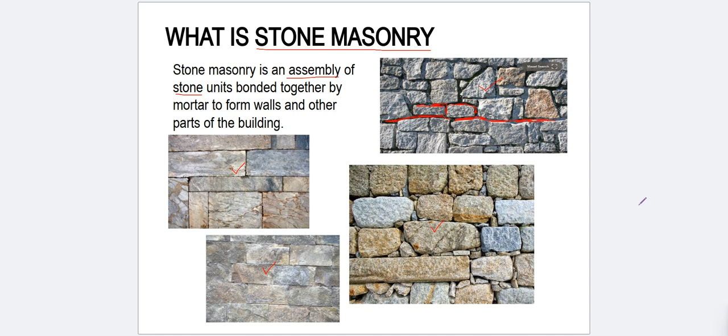So we have different kinds of classification of stone masonry. Number 1, the rubble. If we say rubble, it is essentially crude, uncut stone collected as fieldstone having rounded natural face or angular broken face. These are the angular broken faces - this is what we call rubble, with angular cut faces or rounded ones.

There is no attempt to produce an orderly course, whether vertically or horizontally. Small spaces are filled with smaller stones when laid on a wall. The pattern can be like this - this one is coursed, meaning in a horizontal or vertical manner. So that's how it looks when you lay it in course.

When it's random, if you notice, it has slanting, horizontal, and vertical pieces, and other spaces have been filled by small cuts of stones. So that is random layout. And this here is the coursed layout.

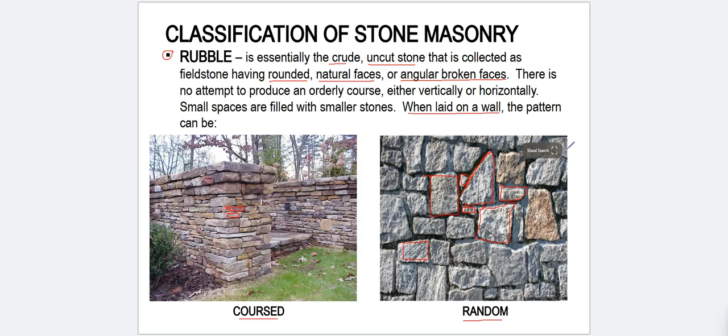So that's the rubble classification. Next, we have ashlar masonry. Ashlar masonry requires the use of finely dressed cut stone - processed stone, cut through machine, and sometimes further treated, like sanded now. It's carefully worked and joined, laid together in cement or lime. It uses cement as a finer bonding agent.

Cement or lime mortar of equal size joints that are at right angles to each other - so uniform. Let's see, is it at right angle? Yes, right angle, same on the other side, right angle. Any design used in a formal layout is ashlar masonry, and we have different kinds - later we have coursed and random ashlar.

So the joints between the stones are very thin. We can obviously see that. So it has regular or uniform thickness, which makes ashlar masonry very strong and sturdy.

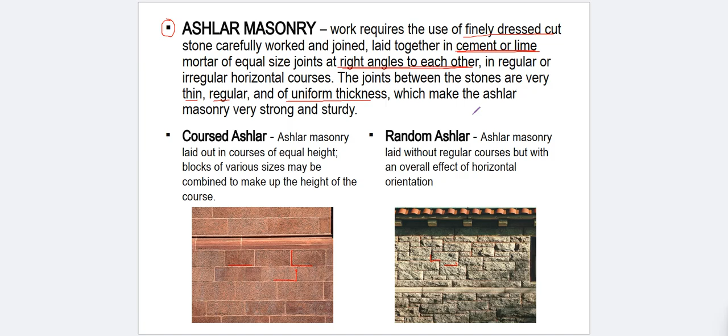Okay, we go deeper into the image of the coursed ashlar and random ashlar. What can you notice about the two, between the two? Anyone? You can raise your hand and give your opinion between the two. Alright, can you speak? The first one who raised their hand.

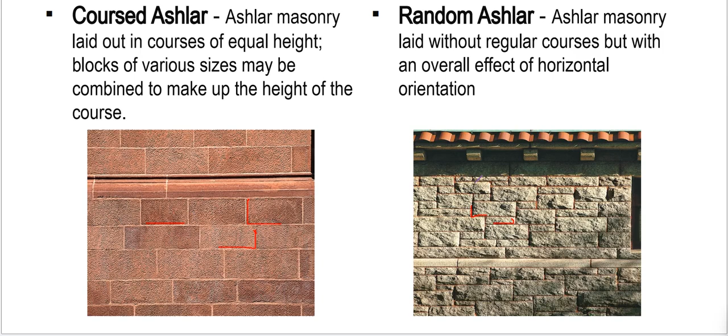So obviously we can see what the difference is between the two, and one prominent difference is the orientation and layout. In random ashlar, the sizes are also random, although the thickness between them is thin, but it still has the characteristic of ashlar masonry. While coursed ashlar, as we saw, is uniform in size. Okay, thank you so much.

We go to the next type of masonry.

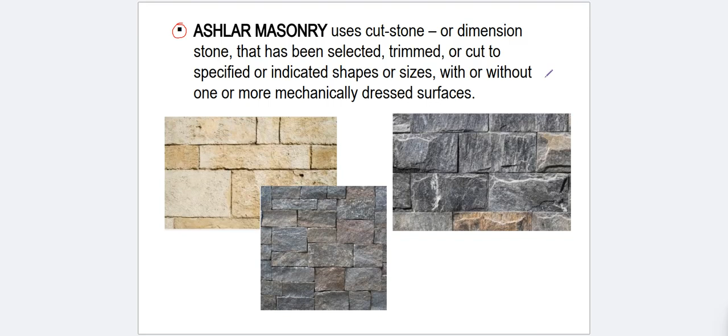Additional definition for ashlar: it could be selected, trimmed, or cut into specified or indicated shape or size with one or more mechanically dressed surface.

Type of ashlar masonry - ashlar masonry has subcategories. There are factors like the arrangement of the stones, laying of the stones in regular course, regular courses with continuous joints, broken courses, height and length define these types.

Number 1 is ashlar rough tooled masonry. In this type, the beds and sides are finely chiseled and dressed, but the exposed face is dressed by rough tooling. You can use a rough tool, like a steel brush, for example. This dressing gives the masonry a rough, exposed finish.

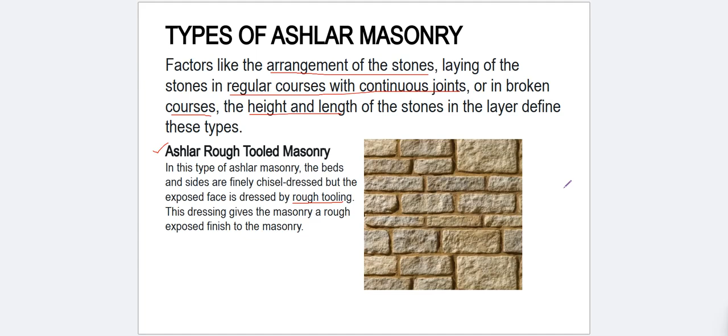If we look at it, even at first glance you can tell it's already rough. Its application can still be used for interior, but mostly it's used for exterior. So that is ashlar rough tooled masonry - tools are used to make it look rough in appearance.

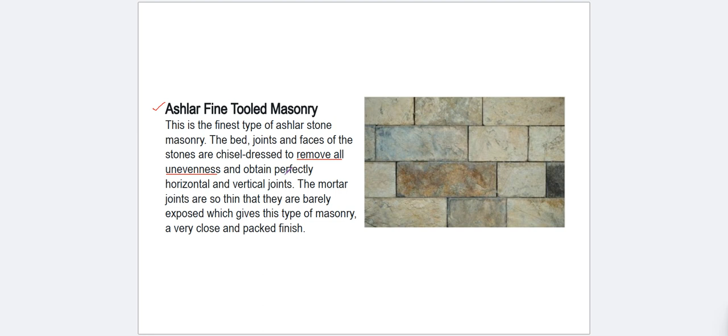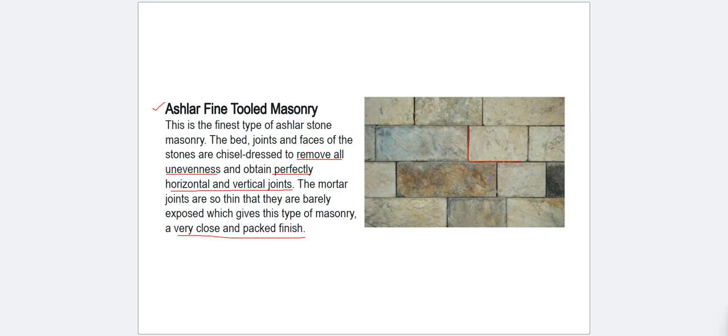Then we have ashlar fine tooled masonry. This type of ashlar stone masonry uses fine chisel dressing to remove all the unevenness and obtain perfectly horizontal and vertical joints. You can see the vertical and horizontal edges are fine. The mortar of these joints is so thin that they are barely exposed, giving this type of masonry a very close and packed finish. This is its appearance when we zoom in - ashlar fine tooled masonry.

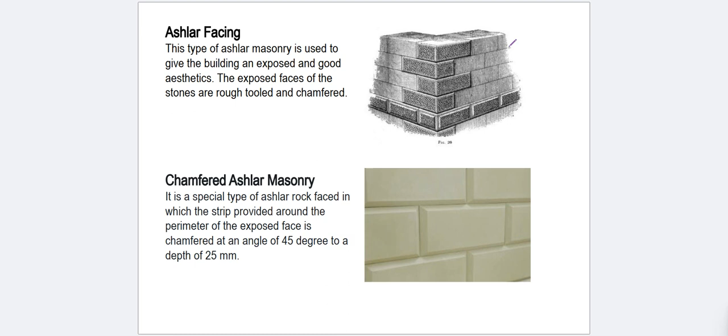Continuing, we have ashlar facing. The facing of ashlar varies depending on the type and location of the masonry on the face of the wall. This is called the ashlar facing technique, a type of ashlar masonry used to give the building an exposed and good aesthetic, especially used at corners.

The exposed faces of the stones are rough tooled and chamfered. Chamfered means it is given a smooth corner cut, usually when it's chamfered.

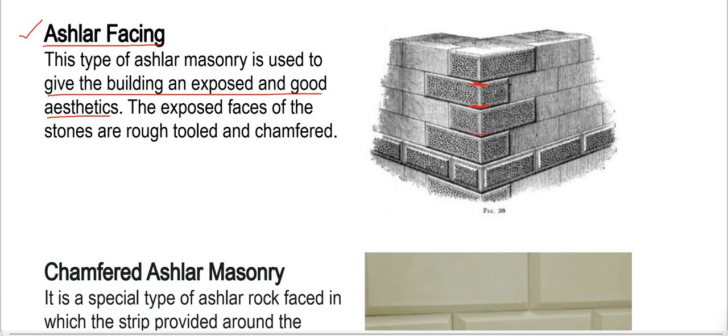Next, we have this type of ashlar masonry, the chamfered ashlar. This is a special type of ashlar rock face in which a strip is provided around the perimeter of the exposed face, chamfered at an angle of 45 degrees to a depth of 25mm.

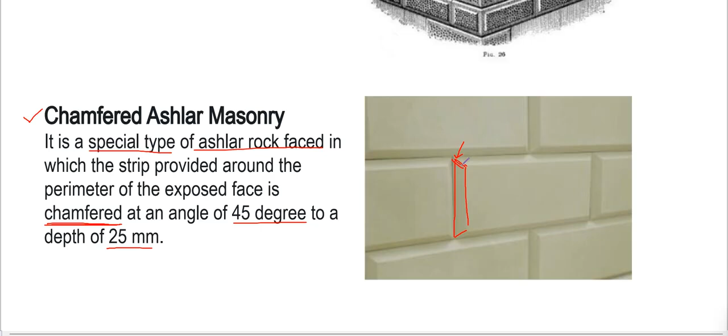Chamfered is the term used here, but in glass, the term used is beveled - we bevel it. So this side is more like cut away from this side area. Alright, so that is chamfered ashlar masonry.

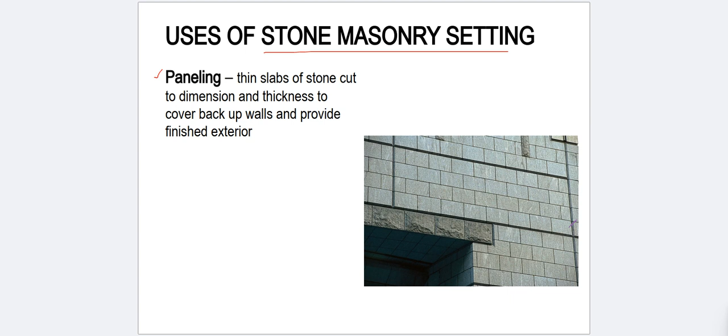Then we have the stone masonry setting - uses of stone masonry setting. Number 1 is paneling. These are thin slabs of cut stones, cut to dimension and thickness, to cover back-up walls and provide a finished exterior. It's used as a finishing material - if you have a back wall that you don't want exposed, you can apply paneling to it.

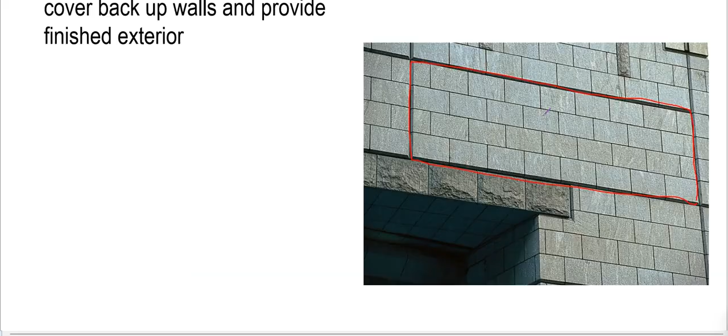A whole cut of stone masonry is placed on your wall. We have different kinds of adhesives used for that certain type of ashlar paneling - stone masonry paneling. That is one of its usages.

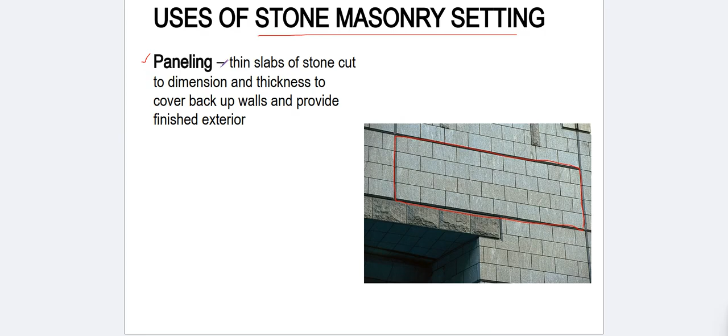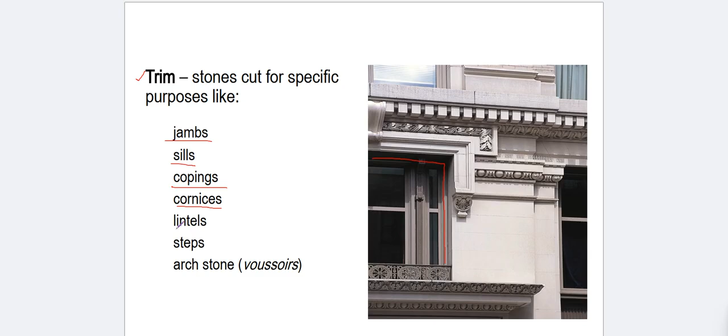We have trim - one is paneling, and we also have trim. These are cut stones for specific purposes like jambs, sills - the jamb of a window - also sills, coping, cornices, lintels, steps, and archstones, or what we call voussoirs.

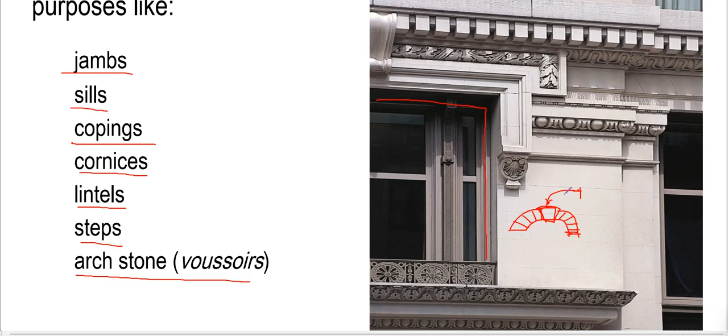That is the arch stone voussoir. Next, usage.

Checklist for stone masonry: how to check a good type of stone masonry. The quarry must have sufficient stone of the selected color to satisfy the needs of the project. Stone selected must be capable of withstanding the rigors of weather. Veneer thickness is a function of panel size, regarding handling, transportation, erection, and structural adequacy, with details of installation to inhibit moisture movement.

So we use damp proofing. This is what we place on the connection between the two, for your walls. This area could be your masonry paneling, or your trims. After that, there's damp proofing and backup material before, so that water cannot get in - to inhibit moisture movement.

Next, mortar, when used, should be of the non-staining type so it doesn't leave marks on our stone masonry. Obtain samples to verify color, finish, and texture variation. That's the most important part - why the client is using natural stone - because of the color, finishes, and texture.

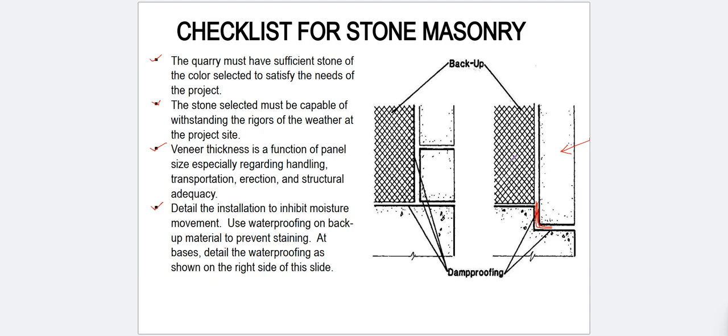So those are the checklist items that you need to do when you encounter masonry finishes.

Next in our discussion is brick masonry. We already know what brick is, but we will define it in our discussion. So brick masonry involves the assembly of bricks.

Earlier we discussed stone, right? Now we use brick instead. It includes mortar, which is placed in the middle between the two faces of your bricks, joint, bond or tying, and workmanship to ensure performance, appearance, strength, and weather tightness. So that is what we call brick masonry.

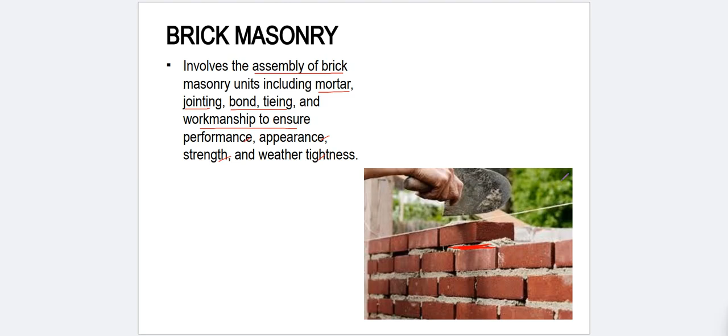So this can also be called layout. So what is a brick? Brick is made from clay or shale that is finely ground, mixed with water, molded into the desired shape, dried, and fired in a kiln.

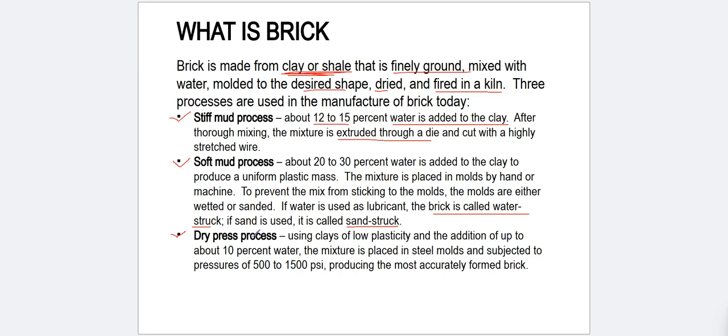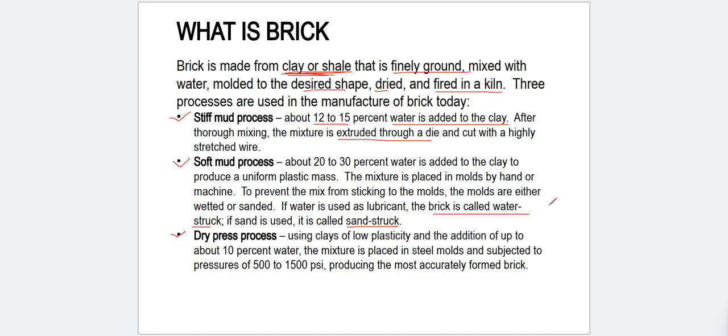Next type of process for bricks, we have the dry press process. Using clay of low plasticity with the addition of up to 10% water, the mixture is placed in steel molds and subjected to pressures of 500 to 1,500 psi, producing the most accurately formed brick. So that is the dry press process for brick making.

We have types of bricks. The building brick, commonly the red brick you can see used as material for walls, used for foundations, also as backup for exterior solid walls. It is used as facing brick depending upon its color after firing - there's light red to dark red. Whether the face has been textured by scoring, combing, wire cutting, or otherwise treated provides a unique surface appearance - it gives a different effect when used as finishes for our walls.

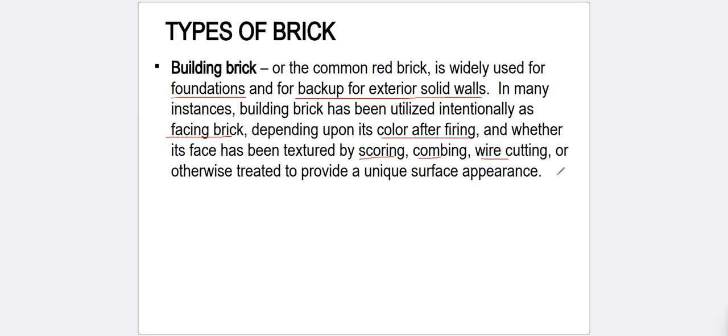We have facing brick, another type. It is made from clay, shale, or fire clay, or a mixture of them, under controlled conditions. The appearance is governed by three types. Number one is general use, exposed exterior and interior for masonry walls and partitions, where wider color range and greater variation in size are permitted.

Number two, general use for exterior and interior where a high degree of mechanical perfection, narrow range, and minimum permissible variation in size are required. Then lastly, bricks are manufactured and selected to produce characteristics of architectural effects resulting in non-uniformity of individual units - similar to the layout concept we discussed with stone masonry earlier.

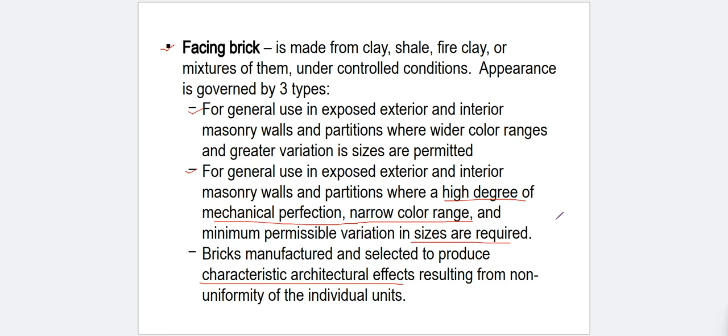We have another type, the glazed facing brick. It's still a combination of clay, shale, or fire clay mixture similar to facing brick, with a finish consisting of ceramic glaze fused into its body.

So the other requirements are concerned with properties of the finish with respect to imperviousness, resistance to fading, resistance for crazing, flame spread, toxic fumes, and hardness and abrasion resistance.

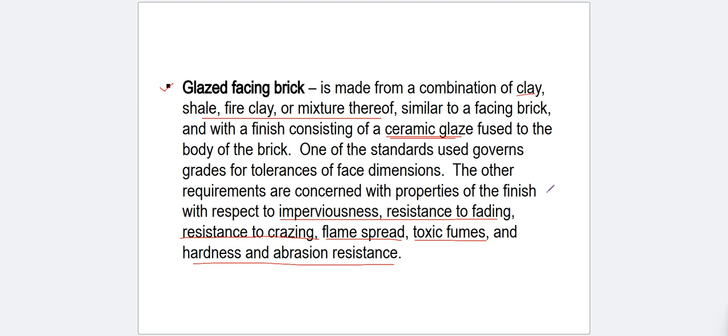Another important factor for bricklaying is the mortar. That's what we put on the face of our brick in order for the two bricks to combine or bond. So the primary function of mortar is to bond.

Together so that the mortar joints are durable and act as a seal also against entrance of water. Because if there's no seal, no mortar, water will enter inside your brick masonry.

Another important property of mortar is workability, meaning it can be adjusted, or there's an adjustment between the two pieces. Also water retention, strength, and its ability to heal minor cracks.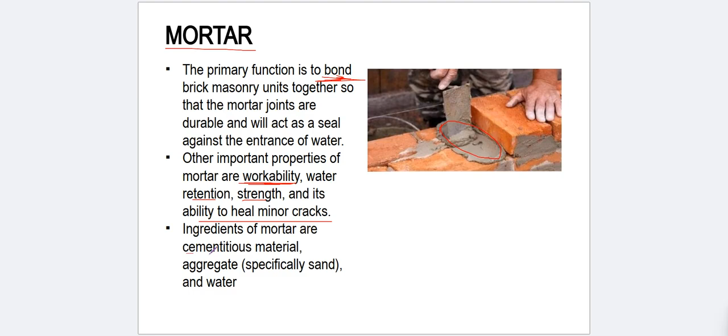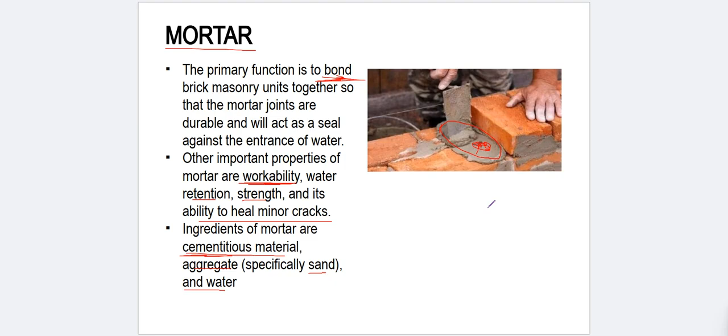Ingredients of mortar are cementitious material like cement, aggregate specifically sand so it's fine when mixed, and water. So that is the bonding agent, the mortar.

Typically, compressive strength of mortar ranges from 350 to 2,500 psi.

So the adhesive quality of mortar is increased by two ways. Number one is mixing mortar to the maximum flow, and using the maximum amount of water and re-tempering or replacing water lost through evaporation.

You let it evaporate first, then you add water again, to strengthen the bonding quality and durability. Then also wetting clay units.

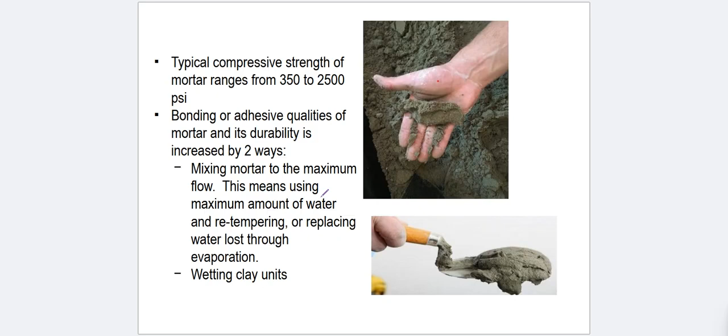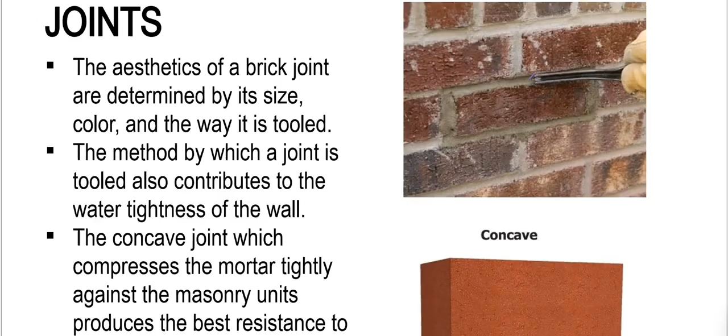Joints. These are the techniques on how to manipulate the face or the finishes of your mortar. So this is how it looks, as you can see in the image, like using a tool, a tool that is used for concave, so it creates a groove in the mortar bonding of two bricks.

So it is an aesthetic of brick joint determined by its size, color, and the way it is being tooled. The method used as a joint tool also contributes to the water tightness of the wall.

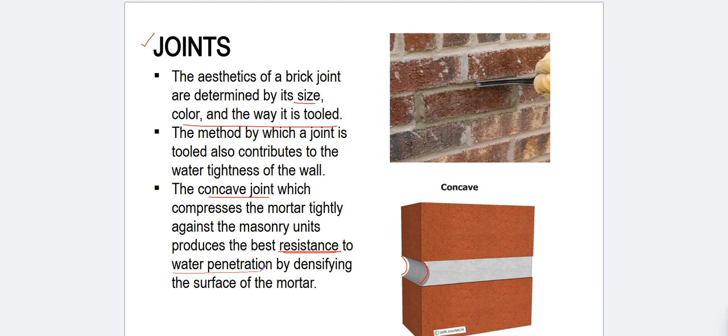The concave joint, which compresses the mortar tightly against the masonry unit, produces the best resistance to water penetration by densifying the surface of the mortar.

So earlier that one is concave, this other one is flush, or flat.

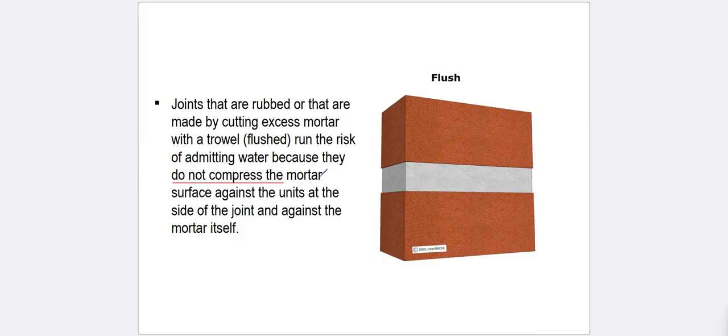So the joints that are rubbed, that are made by cutting excess mortar with a trowel, run the risk of admitting water because they do not compress the mortar against the unit and the side of the joint against the mortar itself.

Next type of mortar defining, we have the struck. It is also struck and rake joints, called struck and rake joints, do not shed water and can promote leaking. So this is how struck, rake joints look.

That's struck. For rake, here it is. So it's like a portion is removed, on the masonry side, I mean the mortar side.

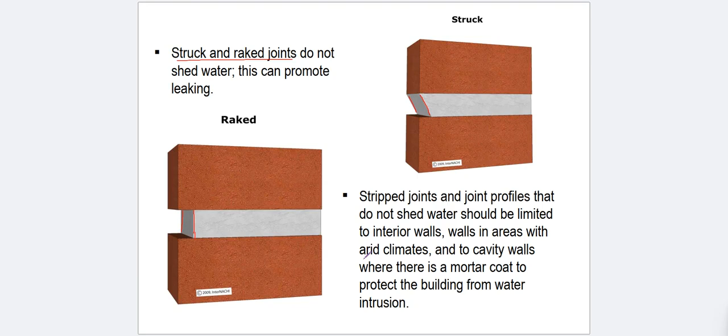Stripped joints and joint profiles do not shed water, should be limited to interior wall areas with arid climates and cavity walls where the mortar coat protects the building from water intrusion.

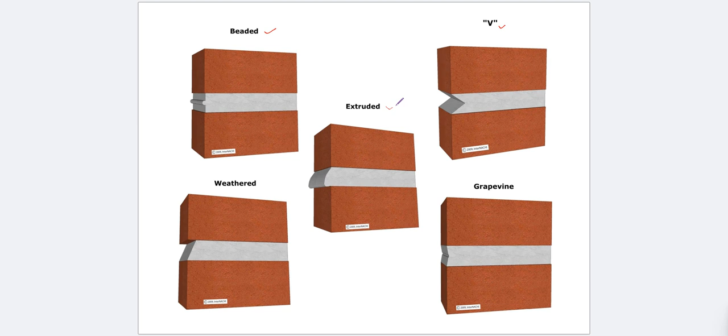And other examples of how you do aesthetics in mortar cutting. These are the examples: the beaded, the V-shape, extruded, grapevine, and weathered.

Bonding patterns. So these are the laying of units, rows or courses to tie units together. It is developed by the mortar filling between layers of bricks and grooves when bricks are laid adjacent to each other.

So its courses consist of units laid end-to-end, which we call the stretcher, with headers, which is the shorter dimension of the bricks. Stretcher is the term used when the bricks are laid with its longer side exposed. And the header term is when the units are laid on its

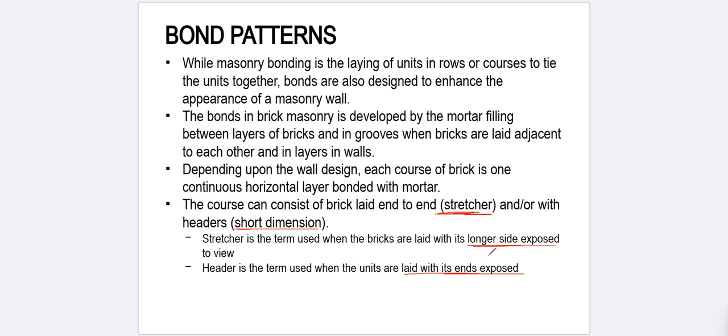when the shorter units are laid with its end exposed. So stretcher is when the long side is exposed, header is when the shorter side is exposed. Okay? This is how it looks.

So, these are the common types of bond patterns. The stretcher, or more known as running bond, is a pattern created by laying bricks end-to-end or long dimension. As you can see, the longer dimension is facing you, facing the wall, the face of the wall.

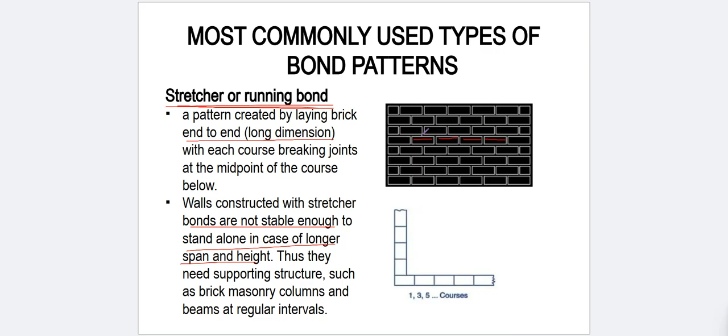So the wall constructed with stretcher bonds is not stable enough to stand alone in cases of longer span and heights, that's what is used. Thus, they need supporting structures such as brick masonry columns and beams at regular intervals. Okay? So that is stretcher or running bond.

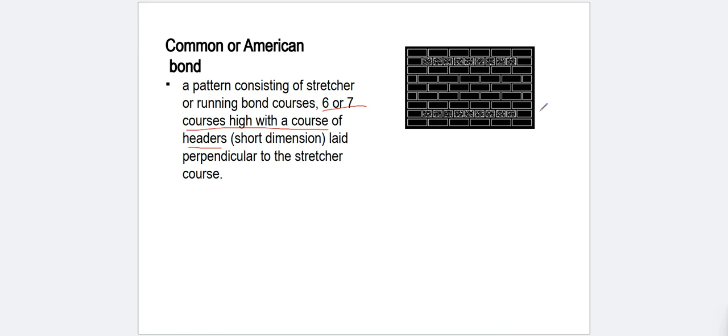Next is the running bond, the common or American bond. This is the pattern consisting of stretcher or running bond courses, 6 or 7 courses high, with a course of headers in the short dimension. So you can see there are portions here with shorter dimensions, laid perpendicular to the stretcher course, perpendicular to the longer side.

Next we have English bond. Oh, this is it, sorry. These sides are being laid perpendicular to the longer side.

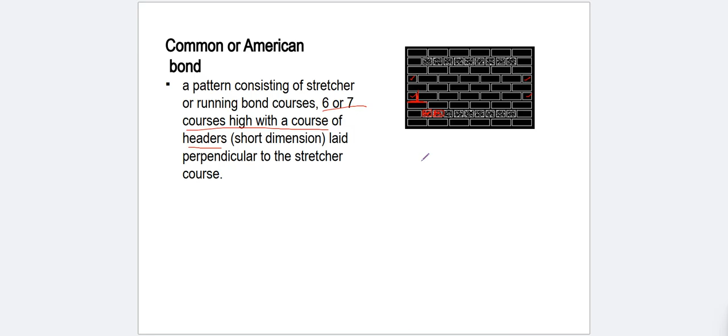Next is English bond. We have a pattern consisting of alternating courses of stretchers and headers. Stretchers, headers, stretchers, headers. So that is English bond.

Next in our list is Flemish bond. It is created using one header, okay, followed by a stretcher in a course. This is it. Header, stretcher, header, stretcher, header, stretcher. Okay? So that is the Flemish bond.

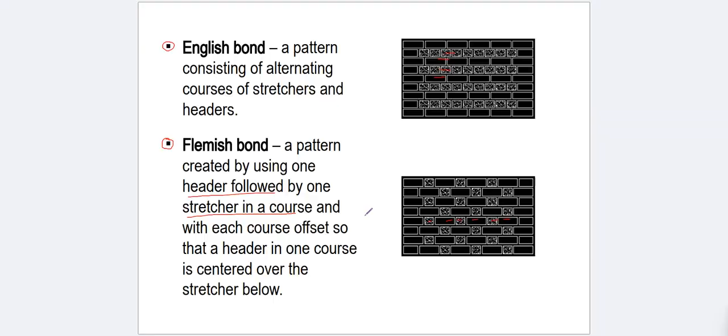We also have other types of bond. The stack bond, which is laid so that the horizontal and vertical joints are all in one line. You can probably see that in CHB, where the edges are in one line, vertically aligned.

Soldier course: brick laid on end with the face showing, used essentially for belt courses or flat arches. Row lock courses, header bond, and sailor course. So, read it yourselves.

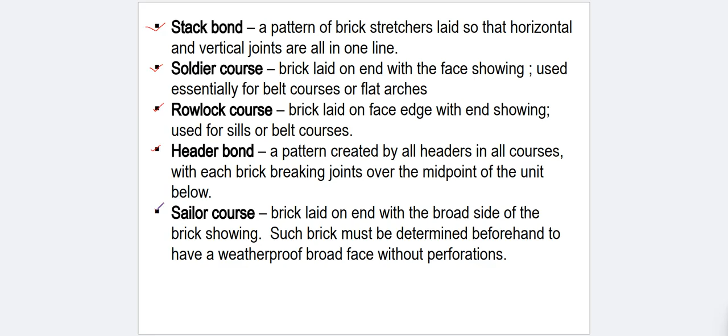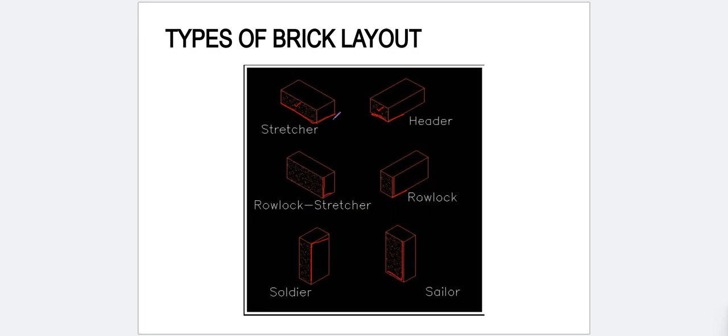Okay, so they have differences, and each one of them has its name and layout. Notice that the portion with the dots is the one on the face of the wall - that's the side that's facing you, for each type of brick layout.

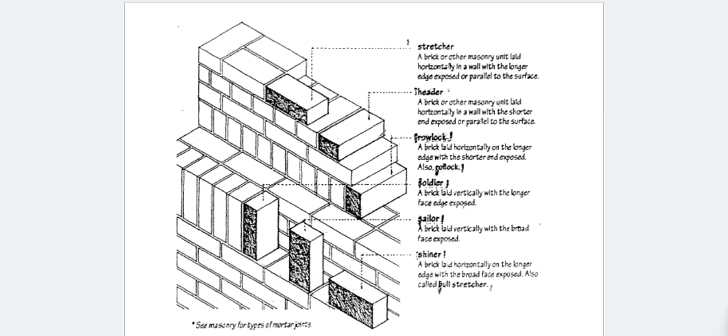This is what we see in Time Saver Standards: the stretcher, header, rowlock, soldier, sailor, and shiner.

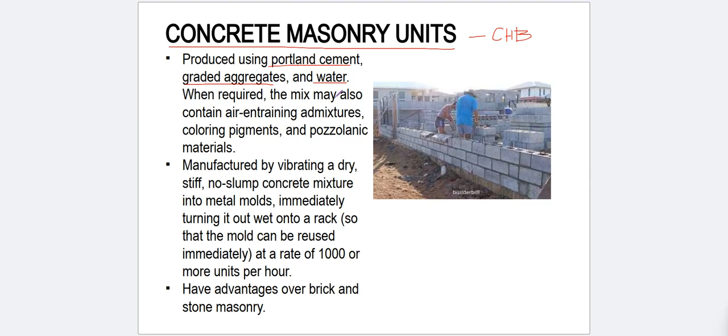Next, we have concrete masonry units, produced using Portland cement, or what we call CHB. Portland cement, graded aggregates - the sizes of your aggregates should be uniform - water, and it is mixed with air entraining admixtures, coloring pigments, and pozzolanic materials.

Manufactured by vibrating a dry, stiff, no-slump concrete mixture into metal molds, immediately turning it out so that the mold can be reused immediately, at a rate of 1,000 or more units per hour. So there's a machine, a CHB molder machine - it can be manual or automatic.

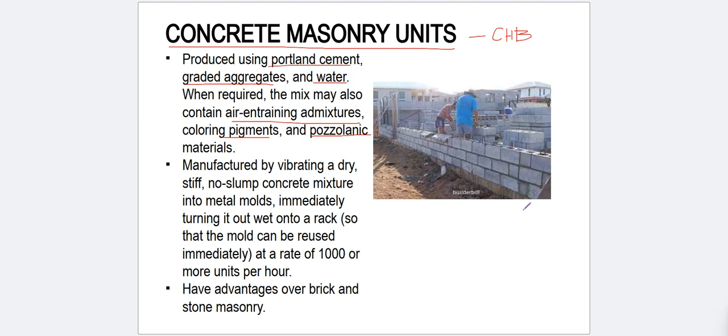And it also has advantages over brick and stone masonry. So we'll look into that.

The curing, essential to control shrinkage, is done in several ways. Number 1 is air drying - basically, you leave it out in the sun for about 2 to 4 weeks. Okay? Steam at atmospheric pressure.

For steam at atmospheric pressure, it's faster at higher pressure, called autoclaving. So you use a machine for that.

CHBs are also made from several shapes and sizes, like 4 inches thickness - this is the thickness - 4 inches, 6 inches, 8 inches thickness. And the standard hollow block size is 8 inches in height, 16 inches in length, and the thickness varies from 4 to 8 inches.

So the most common that we see in our houses is usually 4 inches and 6 inches. The 6 inches we use for exterior wall applications, and for interior it's 4 inches, for economic reasons as well.

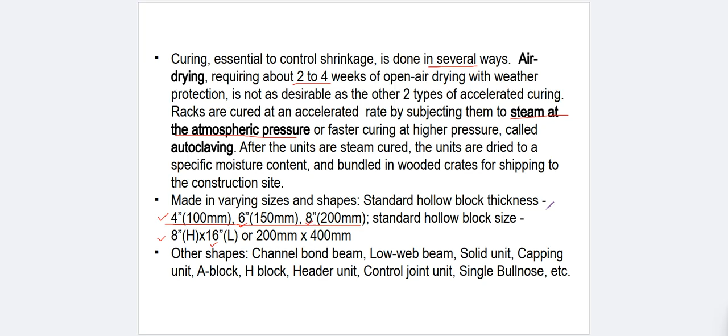Other shapes, for the channel bond - other shapes are channel bond, low web beam, solid unit, capping, A block, H block, etc. This is what it looks like. The typical shape has 2 hollow cores, sometimes 3. There's also one with a hollow core.

So that's the common type. The bond beam is a shape used to bond other portions of the wall.

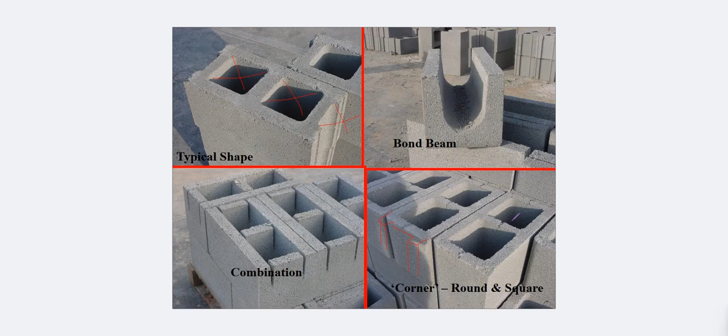The combination, and the corner round square. So if you notice, it doesn't have that kind of shape part. Okay, so that is corner round square.

We have different kinds of advantages: strong, durable, fire resistant, weather resistant, sound resistant, everything.

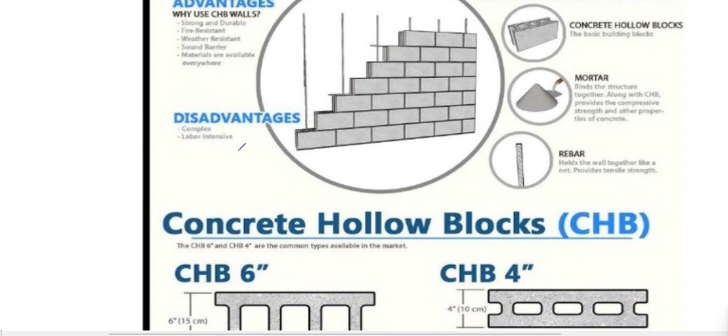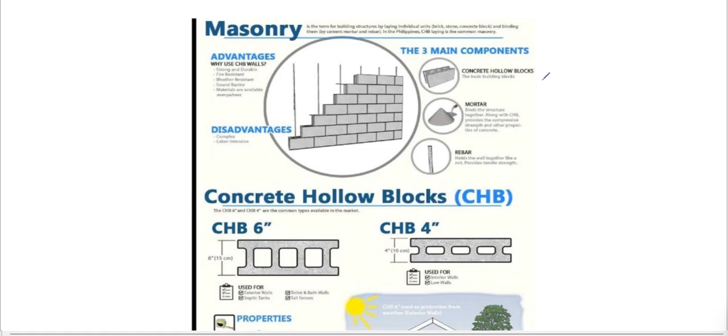Okay, so ito 6 inches na CHB, 3 holes. Ito yung typical na nakikita natin, used for exterior walls, septic tanks, toilet and bath, tall fences. While the CHB 4 inches naman, used for interior walls and low walls.

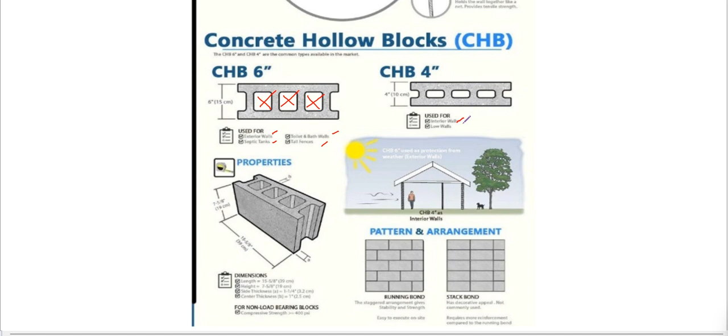We have the sizes. Okay, so ano na natin kanina pala yan, na daanan natin.

2 types of pattern and arrangement, the running bond and the stack bond. So sa running bond, alternate yung kanyang pattern of edges. Okay? Para magkaroon siya ng interlocking. Okay, so kung imagine niyo, yan.

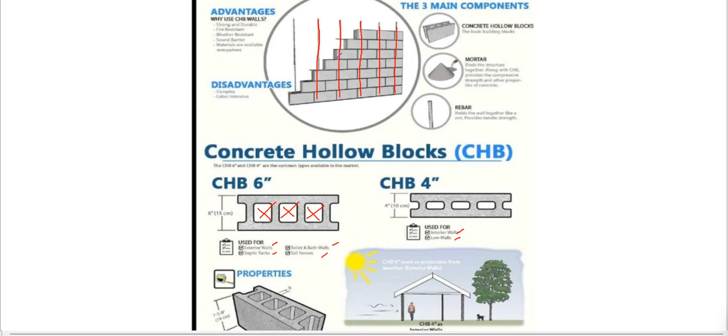Yan, yung mga reinforcement niya is interlocking sa mga CHB, para magkaroon siya ng mas matibay na resistance sa vibrations and other external factors or even internal factors. So that is running bond.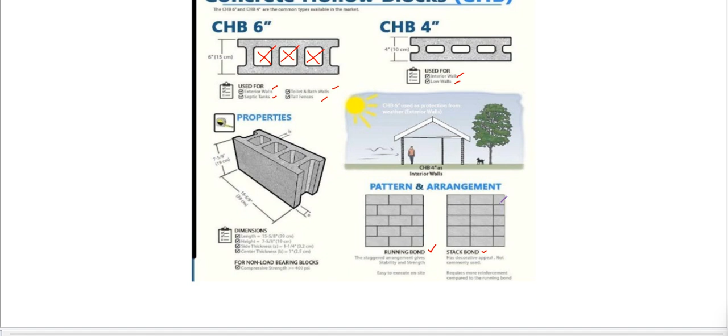Ito namang stack bond, although pareho din siya, we have other approaches naman sa kanya. So that is masonry, I mean CHB masonry.

Next we have the mortar and grout. Magkaiba si mortar at si grout, but it is being used as adhesive, or the bonding agent, for your masonry works. So they have different purpose.

Both products are Portland cement based products, which causes them to harden. So the available sizes of the aggregates, which can be a stone, sand, or etc., and also the quantity of water added to the mix. So magkakaiba sila based on the mixture of what is being mixed in the Portland cement.

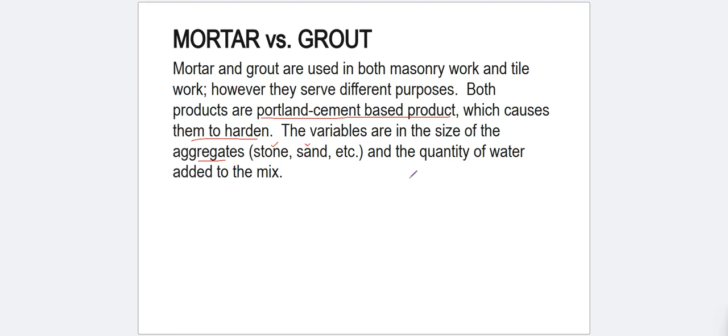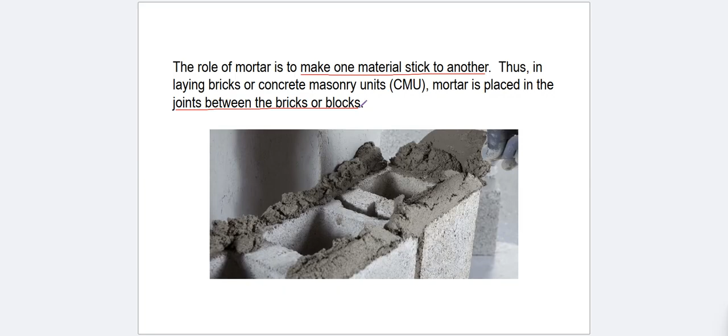So the role of mortar is to make one material stick to another. Thus, in laying bricks or concrete masonry, mortar is placed in the joints between the bricks or blocks. So that is purpose ni mortar.

While the grout naman, yung grout is a filler product intended to flow, therefore it's usually higher water content. Kumbaga yung kanyang purpose is to enter or fill the gaps. A mason will fill the cores of CMU. Kung nakikita natin, it fills in the grout. With a grout pala, a person installing tile use grout to fill the spaces between the tiles.

Ito yung grout, no? Yan, in between the two tiles. Yan yung ginagamit niya. Yung ginagamit niya dyan is yung grout.

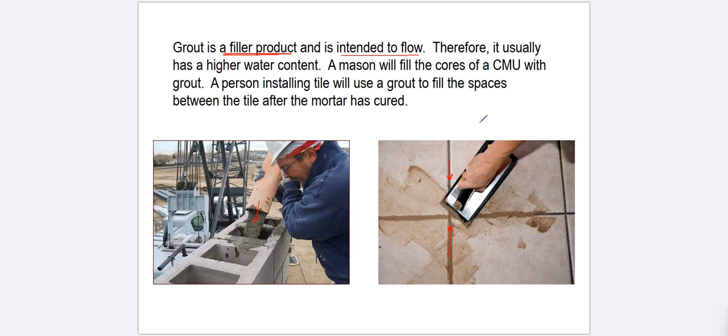Mortar joints. Mortar joints normally 1/2 inch. Two types of mortar beds are used. Full bedding. Full bedding mula gilid hanggang taas.

Hanggang gilid ulit, yan yung full bedding. And face shell bedding, only the side ay yung full pala is hanggang pati dun sa horizontal side niya is nilalagyan so that the bond is much more stronger. While the face shell bedding naman, only the face shell is being applied with mortar.

So strength ang important factor pag nagbe-bedding ka, okay? The more mortar you put, the more strength it provides. Pero disadvantage lang nun is masyado siyang laborious, or matrabaho siya gawin.

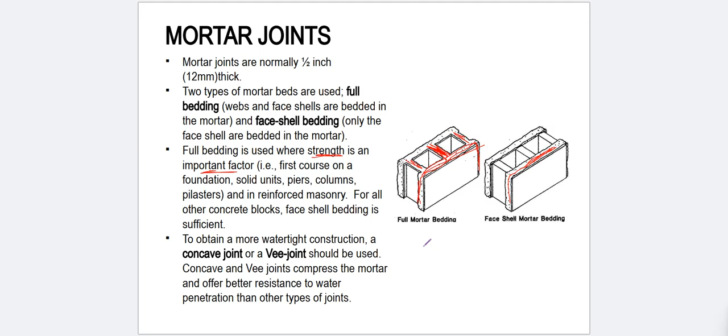Obtain more watertight structure, a concave joint or V-joint should be used. The crack control for masonry.

So while several factors will cause the masonry to move, like thermal change and change in moisture content, shrinkage due to moisture loss is significant and should be addressed with measures to inhibit crack formation. So there are two methods to accommodate the shrinkage: we have to introduce control joints and provide reinforcement.

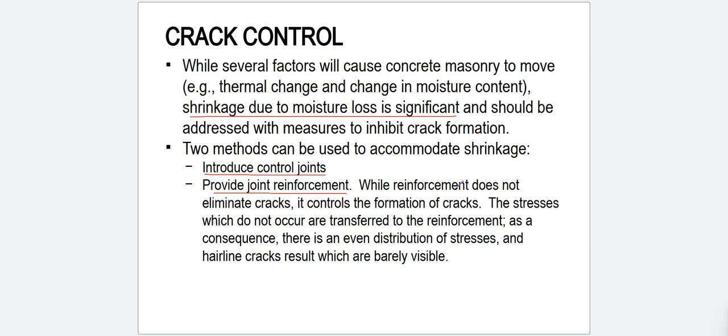Gaganyan yan eh, pag walang control joint, didiretso siya dun, o kung saan man niya gusto. Yan, didiretso yan. Ganyan yung palagay na lang natin. So didiretso yan pag walang control joint.

Pero pag may control joint, yung crack niya is, kung di maiwasan, is hanggang dito lang. So yung damage is being controlled by the joint or the control joint. Hanggang dyan lang siya if ever man na mag-crack yung continuous wall natin.

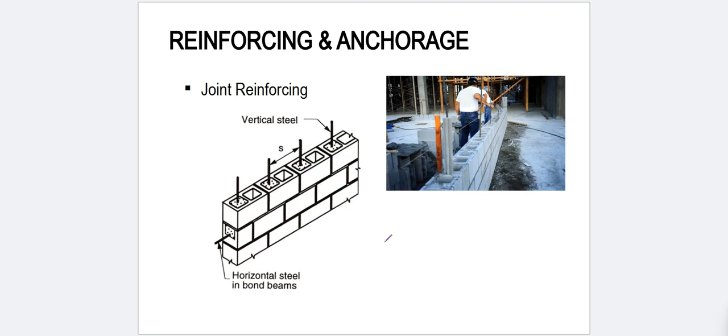Okay, next is reinforcement. So yung steel reinforcement have dimensions or variations, or di kaya, there's a reinforcement in every specific span, specific span of masonry layout.

So, avoid CHB laying guidelines: avoid freshly made CHB kasi mahina pa yan. Pag uncured yung CHB, they are in the state of shrinkage, or nag-absorb pa ng tubig. Kailangan kasi silang basain every day kasi nag-absorb sila ng tubig. Pag hindi mo yan binasa, your CHB will be weak.

So store CHB for at least 14 days for curing before using them. Recommended to test the compressive strength, dampen the CHB before laying as dry masonry absorbs water. Consider plastering and rendering of surface CHB in order to avoid excess absorption.